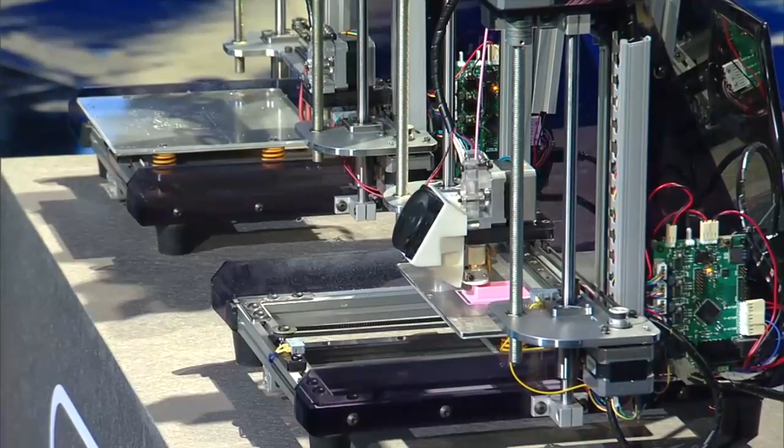Someone I know had experienced a breakage, the failure of the chemical testing equipment, and therefore they contacted the manufacturer, but the manufacturer does not sell the part only to their customers. You have to purchase the whole assembly. So I told him that you can just use the 3D printer and produce the part.

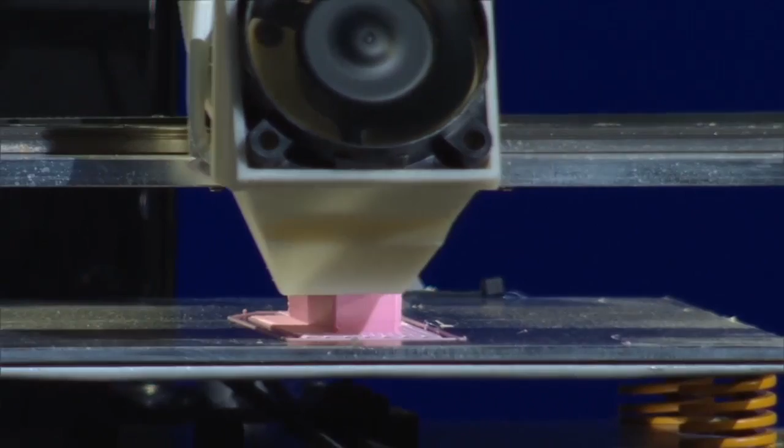So right away, I measured the size and reinforced some weak part, and in a couple of hours, I produced a better product. And how much did it cost? Can you imagine? It was less than 100 won. With a little bit of effort, I was able to help him save 300,000 won.

The second case is during my class. During this semester, I had to make a simple prototype as a team. And our theme was building a fruit peeler. As you can see here, there are many different types of fruit peelers, but we decided to use the potato peelers to build the prototype of the fruit peeler.

Since I had a 3D printer, as soon as we had the design, we could produce it and check and modify it. So it took less than 2 weeks to produce it. This is how we did it. It peels the apple very well. And are there any people who would like to purchase this product? Yeah, I thought the same way as you did.

Now, this person designed this peeler, but he was the only person who could peel the apple like this. None of us could do that. If you have a 3D printer, you can produce the product and see yourself whether the fruit is peeled effectively or not. So today, to help you better understand this, we will show you how using the 3D printer.

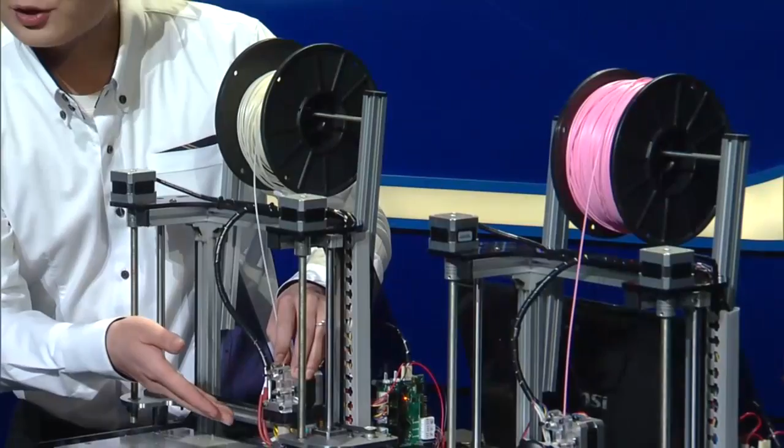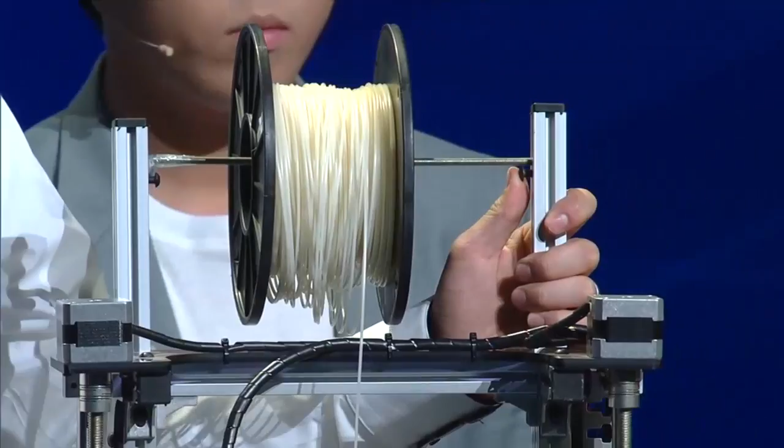This is a 3D printer, but before doing the demonstration, let me tell you the basic principles of the 3D printer. The feedstock is a plastic wire. You can see it here on top. These plastic wires are drawn out into thin threads through the nozzle in front of the machine here. And by moving the nozzle in 3 directions, X, Y, Z, thin layers are stacked on top of each other, and therefore the products are produced. That is the basic principle.

To put it more simply, you know what a glue gun is. The glue gun is like this nozzle. In the case of the glue gun, your hand has to control the gun, but here the 3D printer controls the nozzle to form the shapes on 3 axes. Let us go back to the PowerPoint slides.

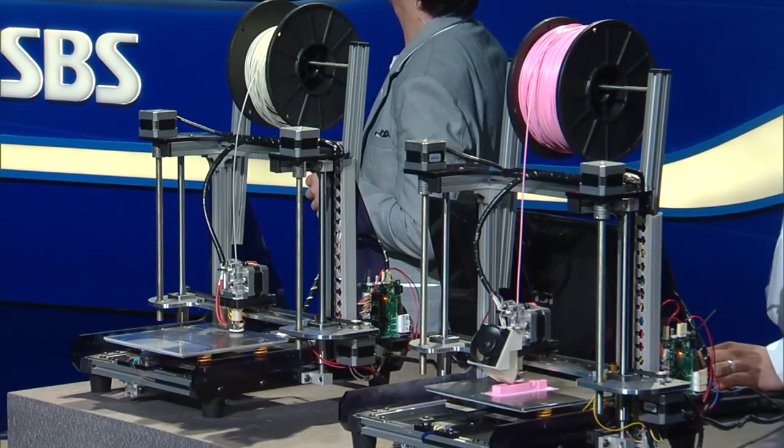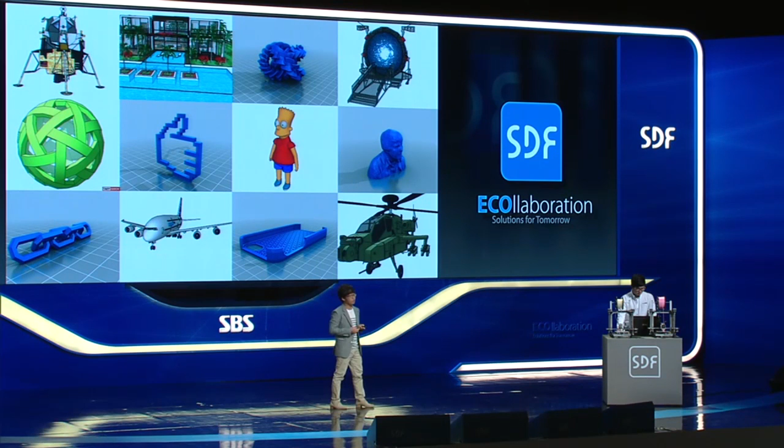To be able to use the 3D printer, you need 3D models. You can produce these 3D models yourself. If not, you can download them over the internet. On the internet, for many 3D printer users, there is a site where you can share 3D models. There are about 80,000 different models on the site. And here we will print a Facebook like button.

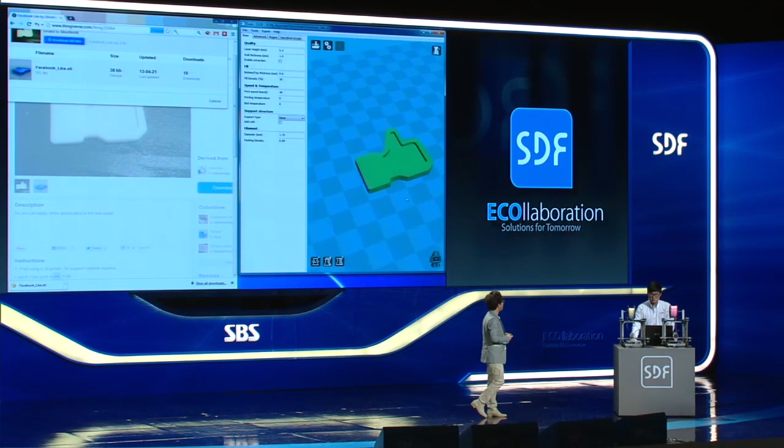Now you search and go into the relevant page, and you have the file. You download the file, and this file can be opened using the 3D printer program. Then, as you can see here, how the prints will be made can be previewed. But this model does not go directly into the 3D printer. You have to first transform it into the language that the printer can understand.

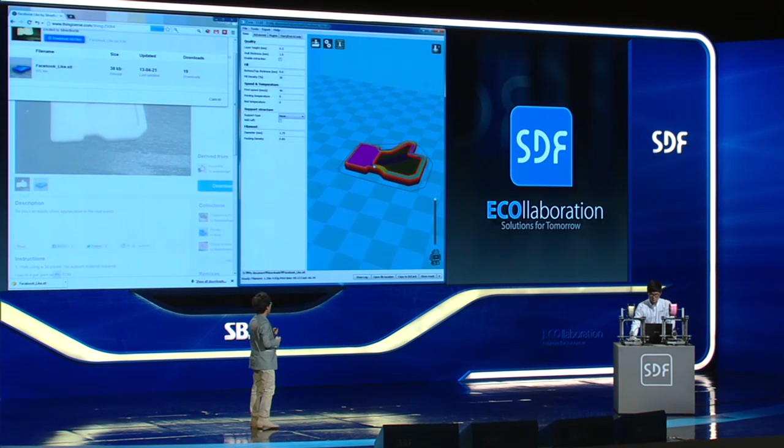This program slices the model into very thin layers. And then through computation, it produces code. After this process, you will be able to see through which route the head will move. And when things are ready, you only need to press the print button. Then the printer starts to print.

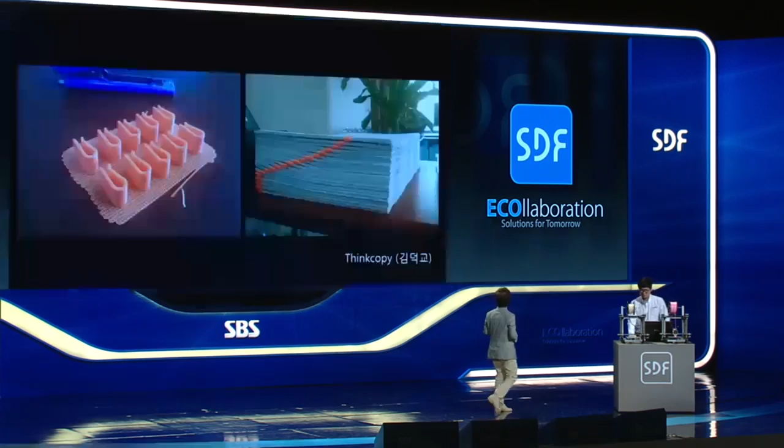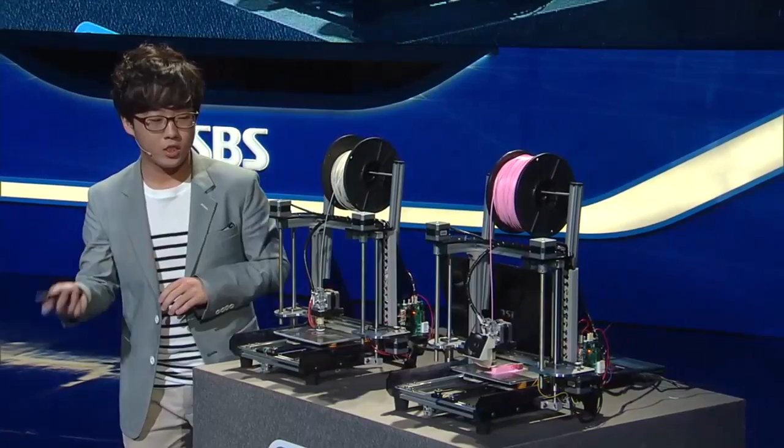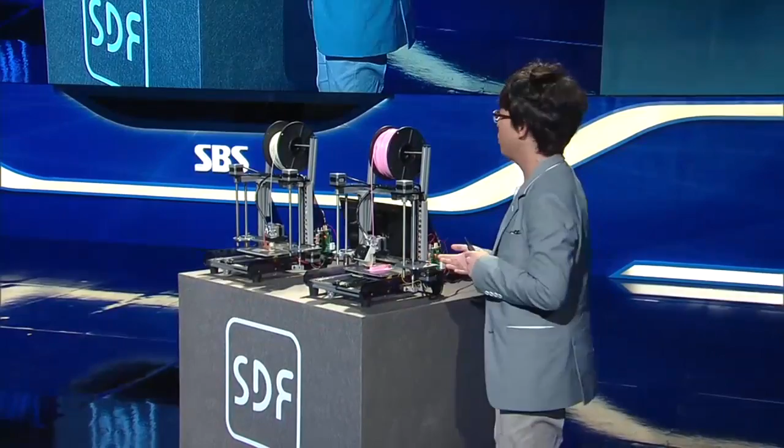Yes, we have begun printing on this printer, as you can see here. And before printing the model, we are preparing the base. And a little bit later, on this printer on the right-hand side, you can see that the model's layer is being piled up. And each layer is 0.2 millimeters. 0.2 millimeters is a very thin layer, so it's really not very easy for us to see here.

And what we're trying to print here is a whistle, a blow whistle. And so once we complete this, you will be able to actually use and blow the whistle. So this pink whistle, a printed whistle, is made. Would you like to blow whistles? I personally like to blow whistles. So let me try to blow this. It sounds good, doesn't it?

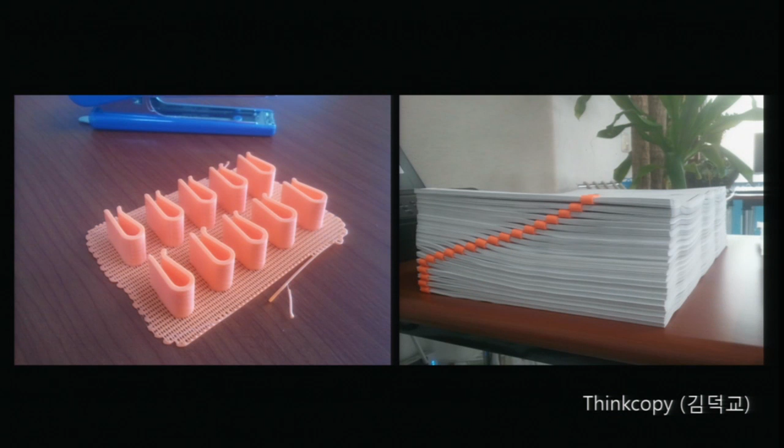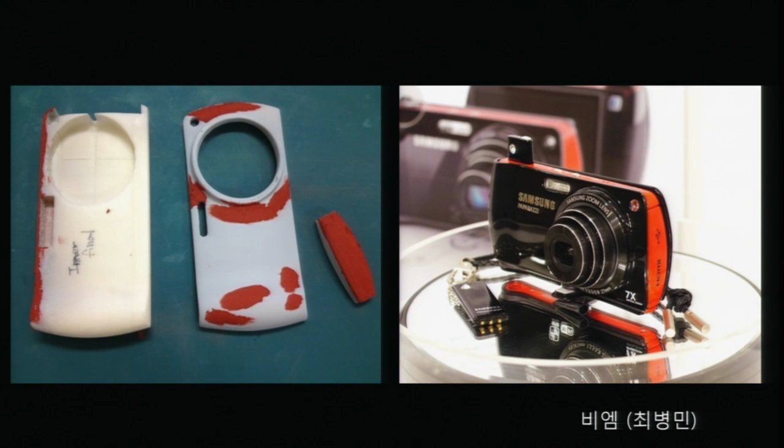The 3D printer you're seeing here is this NP Mendel that we are selling right now. These are the users that have used our 3D printers. For document submission, for clips, or making prototypes like this camera. And after post-treatment, you can come up with this very nice-looking camera. And you can also create a robot arm.

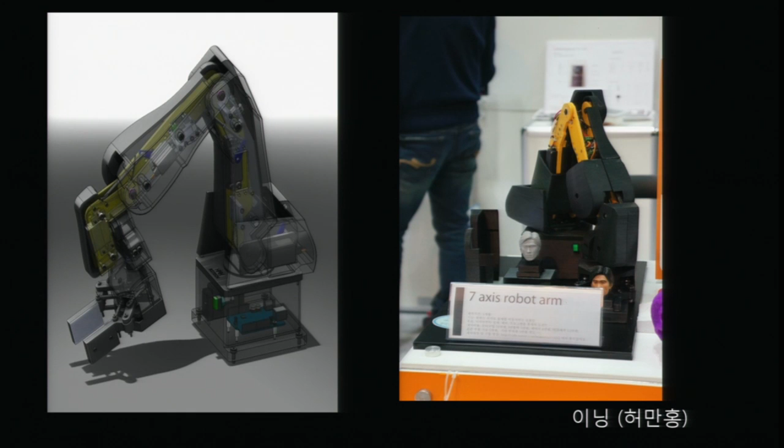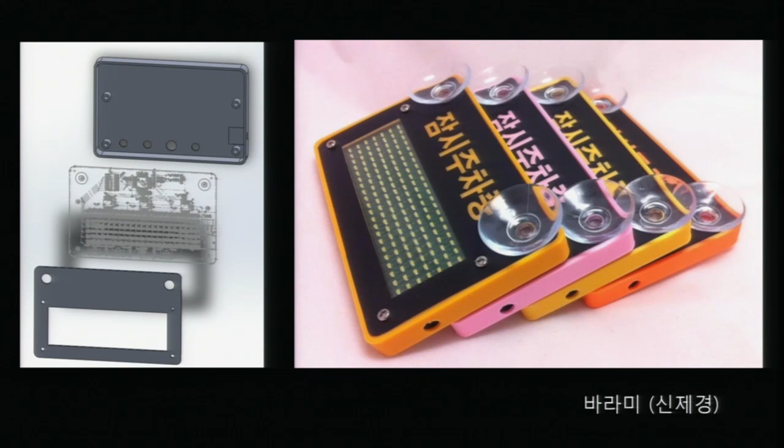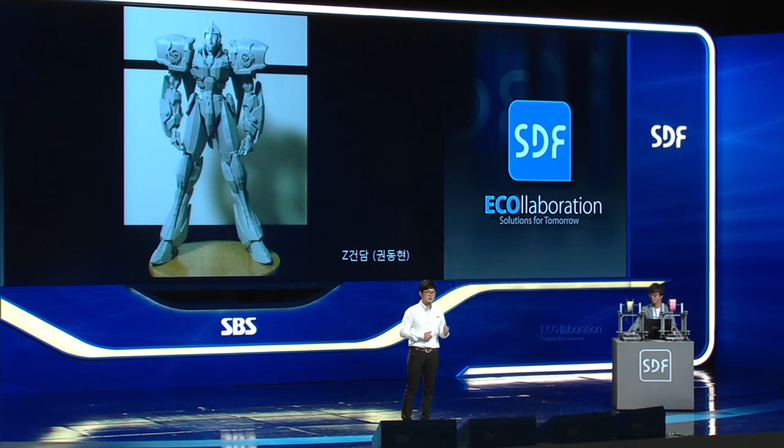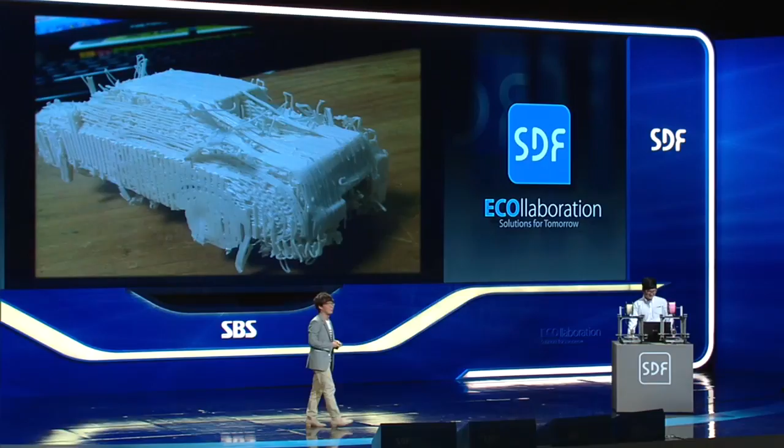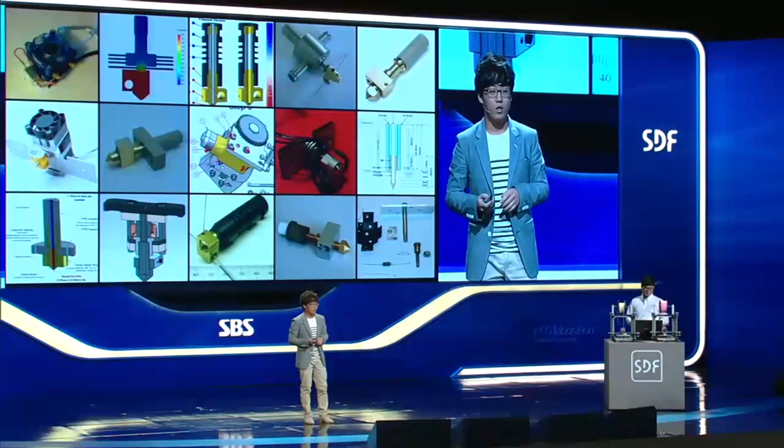And can you recognize this? This is one of the first printed outputs. This is the genesis of Hyundai Motors. It looks like noodles, doesn't it? But at the time, this was something that we were very much looking forward to. But in order to resolve these quality issues, we have analyzed the nozzles. So we have gone through a number of R&D steps and trial and error. So this is the final product. And that's how we came up with these high-quality printers, comparable to the best printers out there.

So what was your dream as a child? Maybe some people still think that I'm a child, but I'm not that young. But as a child, my dream was to become a scientist or an inventor, like in the Batman movie or in 007, someone who makes those weird gadgets and things. Do you know who this person is? It's Alfred, the genius engineer in Batman. A lot of weapons and a lot of cars were invented by this person, and he was my role model.

But now Tony Stark of Iron Man has become my new role model. Why? Because Alfred was doing something good for others, but Tony Stark makes something good and then he uses it himself. So I was inspired by that. But I found that a lot of people around me had similar dreams. We did an open survey, and 19% of the respondents said that their dream as a child was to be a scientist or an inventor. So 1 out of every 5 of you.